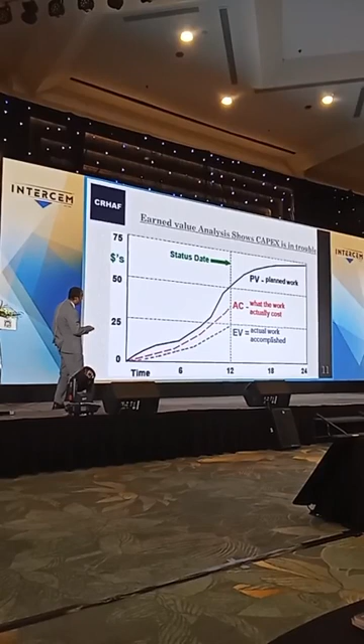We have put a cost like this. So this is $50 million, let's say total project is 75 million, and out of that, say 50 million was our budget for this progress. We have reached to this level, but we have incurred this cost. So this is basically PV, AC and EV.

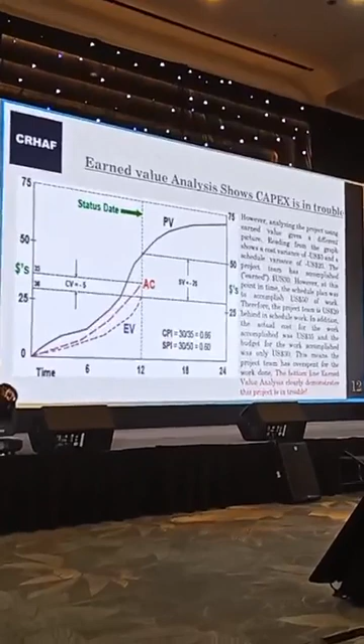So this sheet you can understand more elaborately on this. Let's say, okay, now let's say this situation where we plan for total project of 75 million. Our plan was 50 million in the 12 months to do the activities of 50 million.

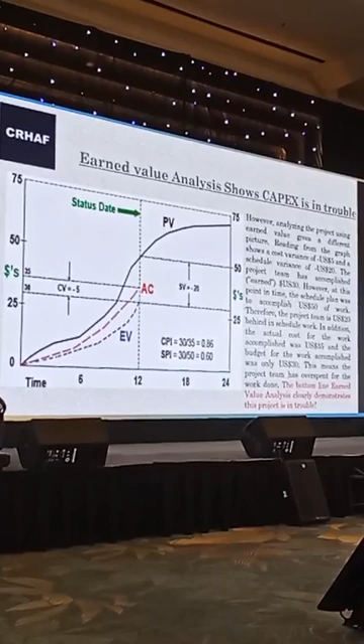We achieved the earned value there, which is around 30 million. But actual cost incurred is 35. So this is basically the schedule variance: 50 minus 30, so 20 million. And this is the CV.

So if you see, in both directions, the project is in a very negative territory. This can be done every month, every 15 days we give the report to the owner, to the investor, outside investor or inside promoters. And we analyze every 15 days the situation of SV and CV.

And from that, mathematically we can get whether the project is in a danger zone or in a comfortable zone. If you see the CPI and SPI, both are below target: CPI is 0.86, SPI is 0.6. So both show the project is in a danger zone. Then comes the mitigation action, how we can mitigate that, what is the real problem, so micro level analysis has to be done to solve this issue based on the earned value analysis.

So this is very popular, particularly for the cement industry, which is very capital intensive. And maximum projects go with 70% debt funding. So it is very important to monitor this, track this. In fact, if you shave IDC by say 10-15% for the whole project life cycle, it gives a huge boost for the IRR for the investor, which will ultimately help the payback period of the project.

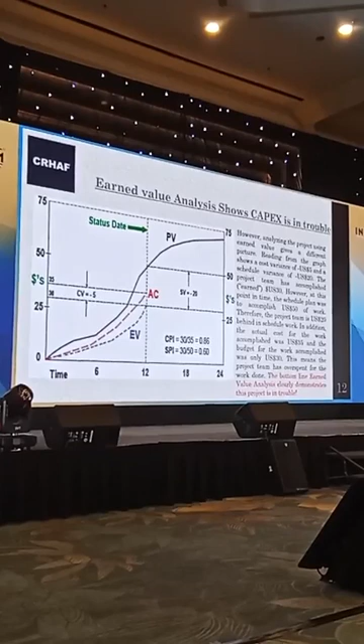The same for when we make the project planning and go for the project execution, we have various levels of contingency. Let's say we make a 15% contingency plan for the whole 24 months. Step by step we can take up the contingency when the project gets delayed or challenges come, and we take care of the cost contingency and the schedule contingency accordingly, and see how it goes and how it impacts.

Sometimes it happens that even though we have put in the contingency, we can come out with a solution for the earlier planned value and earned value, which was negative. We can accommodate that during the project execution, and we ultimately achieve the target time frame and target budget.

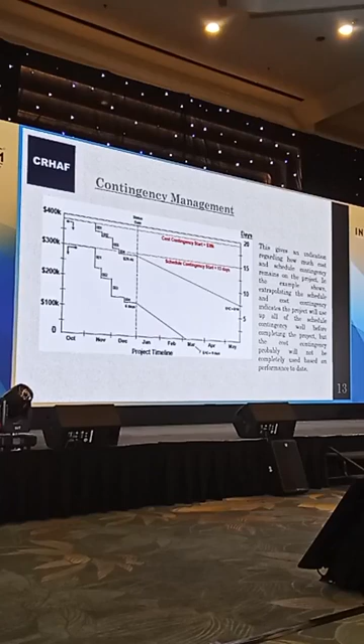Okay, now having seen the mathematical part of the earned value, in the background the ultimate reason for the whole thing is basically the delay. So delay management for the project and delay analysis from the grassroots is very crucial for the project. So how we do that in a mathematical way, and how we make the delay control.

There are various ways of delay analysis, but we feel that for cement projects, which are basically slow moving because you have to have a curing time for the concrete building, we have delay analysis techniques of two kinds: retrospective and prospective. For retrospective we have as-planned and as-built, and for prospective we have time impact and impacted-as-planned.

So this presentation will be available in soft copy, so you can read more on this if you are interested. I'll try to define briefly how as-planned delay analysis works, and how the time impacted as-planned analysis involves the insertion of delay events into a baseline.

So basically, whatever we plan and whatever we have achieved, we make the timeline on that as planned basis. Another approach is the as-built. So whatever plan we have done and whatever we have built, on that we can have a delay analysis approach. We can see the as-planned versus as-built in the same graphical bar chart, and we can see the change of the critical path of the project. It's important that every 15 days we do this, because if there is a big mismatch between as-planned and as-built, and the critical path is going to change, then we try to take some mitigation action to bring the critical path back into the planned zone, so that next month it will be recovered.

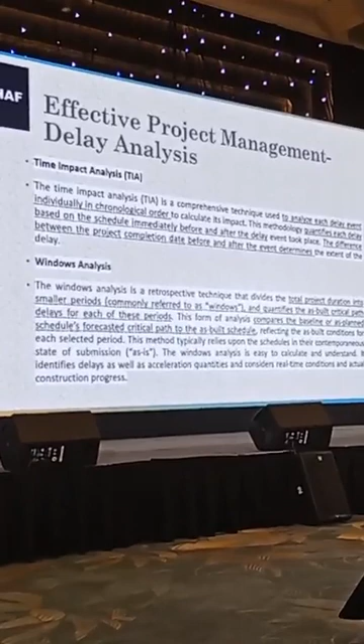Another way is the time impact analysis. Basically, for each delay event, we put all the delay events individually in chronological order and quantify each delay based on the schedule. Similarly, we do the window analysis. This is much more relevant for a project like ours, because there are lots of micro activities, like doing the concrete building, then the machinery coming onto the ground and being put in place, doing the erection. So for each window we make this analysis and try to put it in a figure - mathematically, how many days of delay, and what is the offset from the main bar chart.

Okay, now the commercial part of the delay. When we manage the delay from the commercial side - how the delay will be accountable - we have to put in place a very good contract, a proper contract with the contractor and the supplier, so that delays caused by them can be properly held accountable, and we have to take care of that.

So delay can be of two kinds: excusable and inexcusable. Delay can be on the owner's part, because of the contractor, or both. I tried to define here the Employer Risk Event (ERE) and the Contractor Risk Event. The excusable, or Employer Risk Event, is basically the owner's risk - delay because we could not release the money, or could not get the clearance, or there are other macro events like a COVID-type situation. So we classify what is excusable and what is non-excusable. For non-excusable, we also have to put a figure on how much it is worth in terms of project cost, and accordingly there should be a claim, which we have to match with the contractor's liability. This is also part of project management.

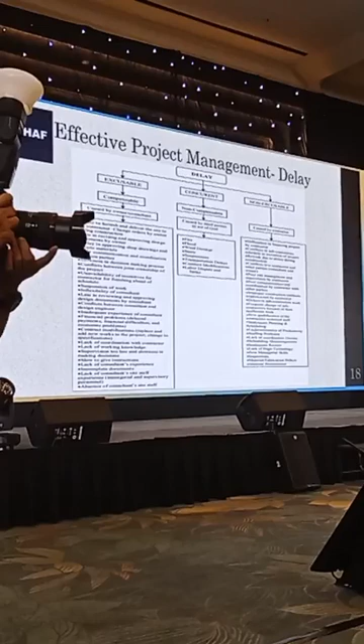And there is non-excusable delay, which is basically due to the contractors or suppliers, and which we can convert into a monetary claim - like poor site management, rework, staffing problems from the contractor, delay in subcontractor's work, inspection delays, and material verification delays. These are all basically non-excusable, and can be converted to money, which we can recover as a loss from the contractor.

Now these are the delay analysis techniques, and these all basically address how we mitigate delay once it happens. We have various approaches to manage delay in the project, which can save at least 80% of the delay event.

So we have the forward approach and backward approach. In most projects, we have this initial planned finish date, and delay happens. So for each activity we put the analysis and see how we can take it, based on the critical path.

Same way, we can shift the actual finished work and see how best we can cover up all the delay and take the forward analysis. In the backward approach also, we take the last finishing date, the cut-off date as per the current situation, and from there we go backward to see how we can safeguard the final commissioning date.

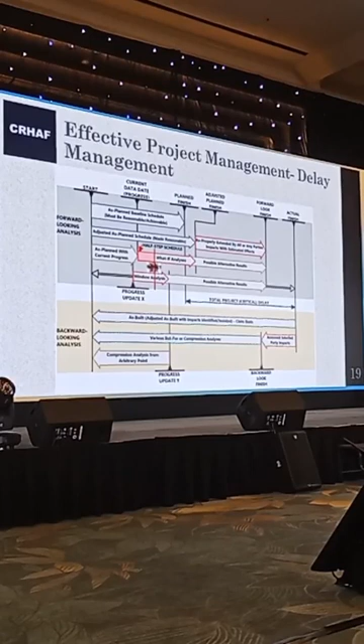So now the strategic part of the project management.

Above all this analysis, this is a basic thing which we need to plan before starting the project and during the project. One is the technical design margin - because the market is dynamic, there has to be a marginal potential capacity of the plant when we design.

And it's very important to manage the finance and spread the drawdown. We need the machine now, or we don't need the machine until, say, after 3 months - no need to pay immediately for the machine. We can open an LC and accordingly spread the drawdown of the fund so that we can save interest during construction.

Then we have the strategic debt equity ratio and managing debt drawdown. Since we go for 70% or 75% debt funding, we can strategically draw down the debt so that our equity contribution is also addressed accordingly.

So these are the dynamic project management and strategic parts of project management, which give recommendations to the owner to make the strategy so that we can efficiently manage the project fund.

By doing all this, we can have a clear margin of debt service coverage, which is very important because in today's world, the high interest rate of the Fed and the US dollar situation is very tough. If we manage 3-4% of the project time per year, it has a huge impact on the total project cost and feasibility.

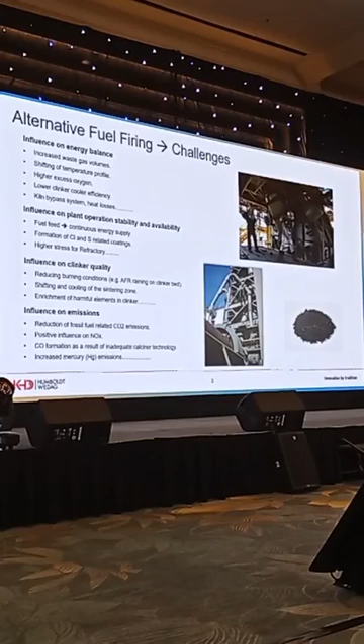The shifting of the temperature profile comes from the burning behavior of alternative fuels. You're feeding lumpy sized materials maybe, and they take a longer time for the burnout process at the end. By this shift, or this longer burnout time for these materials, you're shifting into the lower stages of the cyclones, and at the end the temperature profile is changed a little bit. This means the exit temperature behind the preheater could increase by 10, 15, 20 degrees Celsius.

Also, when you want to burn alternative fuels, you need higher oxygen for the burning itself. This means not only 2-3% oxygen at kiln inlet or behind the calciner will be sufficient. There we are talking about 1% more maybe.

Also, by feeding these alternative fuels, you are putting inside a high amount of chlorine, sulfur, and other things. This means the chlorine contents already coming from the raw material, which may already be creating problems in the calciner duct and the lower cyclone stages in the preheater, can also be influenced by these alternative fuels.

So you are having problems then maybe in these areas, and you have to add also a kiln bypass system, which is creating an additional heat loss of some kilocalories.

But not only all these negative effects I've just talked about are influencing the usage of alternative fuels. There are also some positive effects by using alternative fuels, as you are reducing the CO2 footprint because you're not using the standard fossil fuels normally used here in Vietnam, for example coal or natural gas.

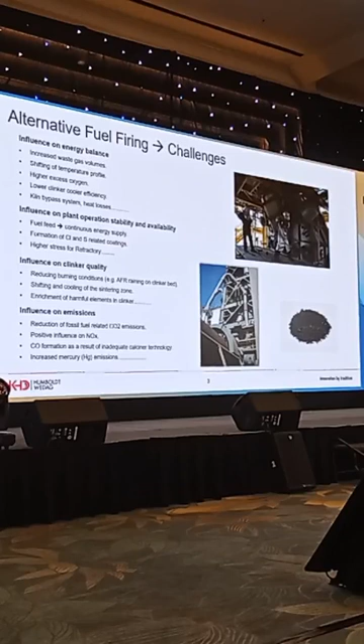We are talking here especially about the pyrorotor, but I want to give you more information later in the presentation. We are talking about NOx emissions coming down by using alternative fuels to a level of, let's say, 500 to 600 milligrams already behind the preheater system.

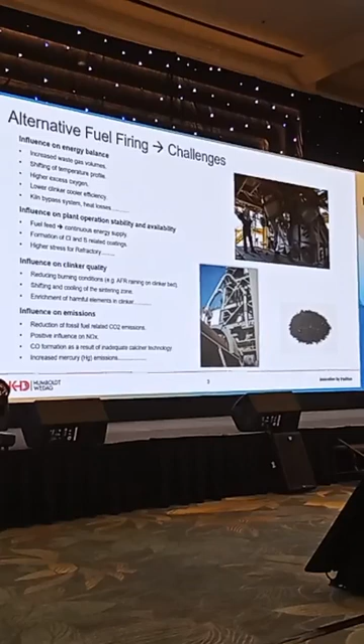When we look at these challenges to the system itself, you have to look also for other challenges when using alternative fuels, and this is the alternative fuels itself. So when you're thinking okay, we can use it, we see the challenges, this is okay for us, you have to think also about getting the alternative fuels from the waste storage areas outside in the right amount.

So we are talking here about values of minimum 10-15 tons per hour, going up, depending on the plant size and the substitution rate you want to use, to 40 or 50 tons per hour. This means up to about 1,000 tons per day of alternative fuels, and this has to be handled and has to be available also on the market.

And then also depending on the system you want to use, because there are very different solutions on the market for using alternative fuels, you have to look at how you are getting the materials, how the situation is in your plant or from the supplier of the alternative fuels, how you can get it in the right size, with the right moisture, and all these things you have to think about.

So at the end, you have to maybe install a storage area with pre-processing equipment inside your plant, with an unloading system, a screening system, a shredding system, and so on. So there are very different points you have to look for, just depending on the system and the waste you want to use.

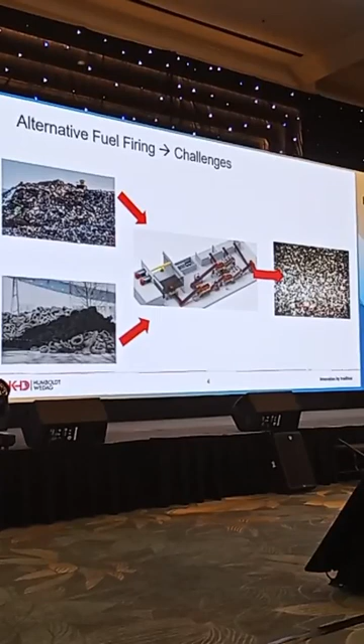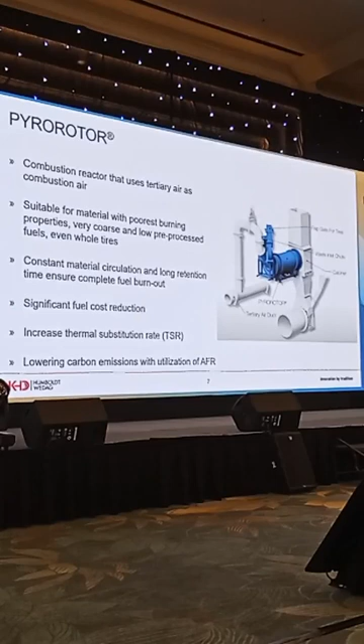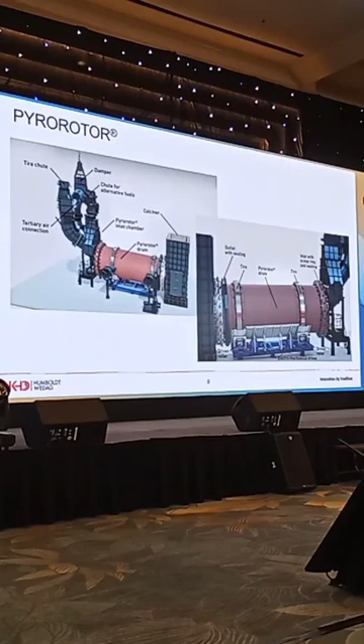So here's just an overview of how such a pyro-rotor looks like. From my point of view, I would say it looks like a ball mill connected to the calciner. At the end, it's like a small kiln, like a small rotary kiln. So you see here the drum of the pyro-rotor itself, the tires, where it looks more like a small kiln. You see the connection to the calciner itself, and also here the connection of the tertiary air, which is used as burning air for the pyro-rotor, the feeding chute for the alternative fuels, and also, if you want to use complete tires, the separate tire chute for feeding the tires inside this pyro-rotor.

So although this product is really pretty new on the market, now for 6-7 years, we are using here in many points a very proven design. So the inlet outlet sealing, the bearings, the rollers, the tires, this is similar to our equipment which we have been using for more than 40-50 years also in our rotary kilns. So you can see it here. The inlet chamber looks similar to the kiln inlet chamber. The sealing systems are completely the same as we use for the kiln inlet or kiln outlet sealings, and also the support rollers of the tires are pretty similar.

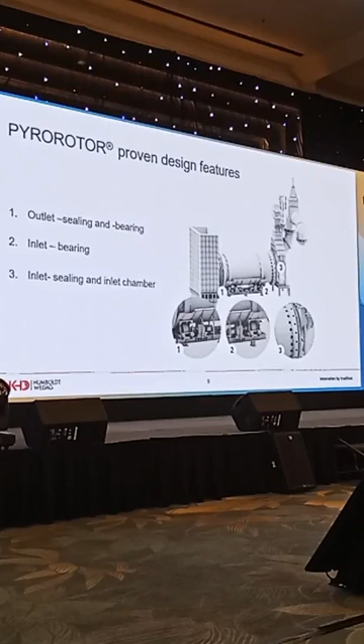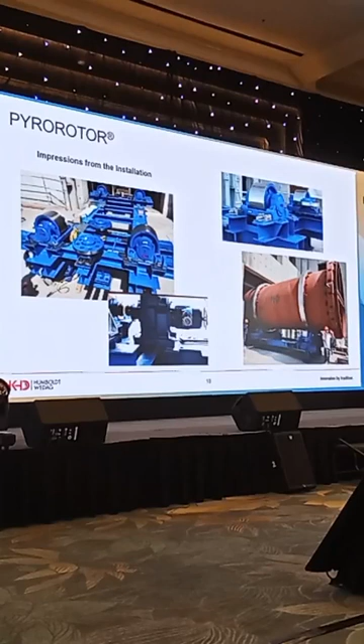Now also some photos from installations. These were from a European country. You see the base frame of the pyrorotor here, where it is later placed, with the rollers. They are directly driven with a motor, so we don't have the girth gear and pinion system like on the rotary kiln - we have directly driven rollers on the pyrorotor. You can see the rollers here, or later on the placed pyrorotor itself on this base frame.

So how's the operating principle? How is such a pyrorotor directly working? Here you see the sketch. As I already gave you the first impression, it's directly connected to an existing calciner system just above the rotary kiln, some meters above.

You need an extraction from the existing tertiary air duct. This means you are taking out from the existing tertiary air a certain amount - approximately 50-60% of this amount is going as combustion air to the pyrorotor. Then you are directly feeding the alternative fuels inside this system and burning the material here inside the pyrorotor. Because of the high amount of fuel and relatively low amount of combustion air, we are creating a CO-rich environment inside the pyrorotor, and the gases then pass through the pyrorotor to the calciner, mixing with the air already coming from the rotary kiln.

In the remaining calciner, we have the effect that the CO-rich gases give the heat on one side to the meal fed from the existing cyclones, for heat transfer to use the heat for the process, and on the other side the CO-rich amount reacts with the NOx-rich environment coming from the rotary kiln. This means at the end you have a good combination of burning the alternative fuels, having heat transfer to the system, and reducing NOx emissions in the existing system.

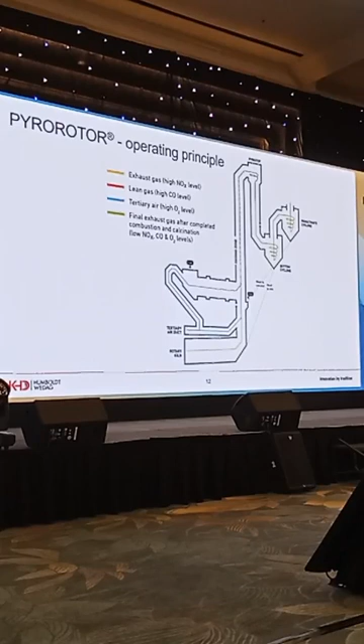So the gas you get from the tertiary air leads to a reaction or burning temperature of up to 1200 degrees Celsius, which gives you a good opportunity for a good burning process, good burnout of the materials, and good behavior of these materials inside the pyrorotor.

With a frequency converter, it's possible to adjust the retention time inside the pyrorotor depending on the type of fuel used. With the new sizes, we can increase this retention time up to 12 minutes now. In the past, with a smaller size, it was only possible to go up to 10 minutes; now with the largest one, it's increased a bit. This means with 10 or even 12 minutes, you're able to burn even very coarse, lumpy-sized material - even whole tires - nearly completely inside the pyrorotor. This is a really good advantage because you're saving costs on pre-preparation, while having the opportunity to realize such a good burnout effect inside the system.

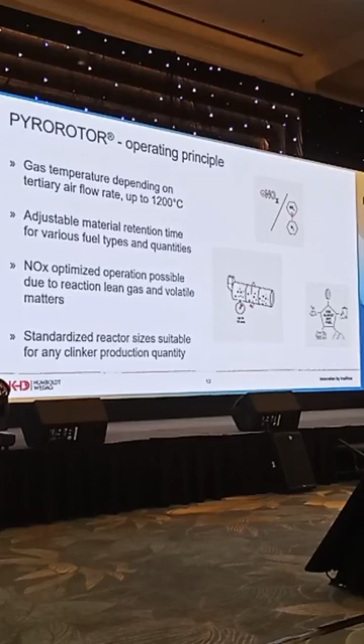Also, as already shown on the paper before, NOx-optimized operation is possible due to the CO-rich or lean gas reaction and burning processes. Now coming to the sizes we offer for the pyrorotor, and also some references.

The standard size is what we normally use on the market. Standardly we offer pyrorotors in diameters of 3.4 or 4.2 meters. This covers the range of production capacity for clinker lines between 3,000 tons on the lowest side, and on the highest side with the 4.2 meter, we can offer for plants with a capacity of 7,000 or nearly 8,000 tons.

When we go below this 3,000 tons range, we have now also developed a smaller size with only 2.8 meters in diameter, and for kiln plant capacities over 8,000 tons, we have a 5-meter pyrorotor. You see the amount of alternative fuels that can be fed to such a system - in the standard range we're talking about alternative fuel feeding capacity of nearly 500 tons per day, or even going up to 800-900 tons per day. This amount of fuel has to be handled also in your plant - you have to think about the size of storage and pre-preparation. This is not necessary in this case with such implementation of the pyrorotor.

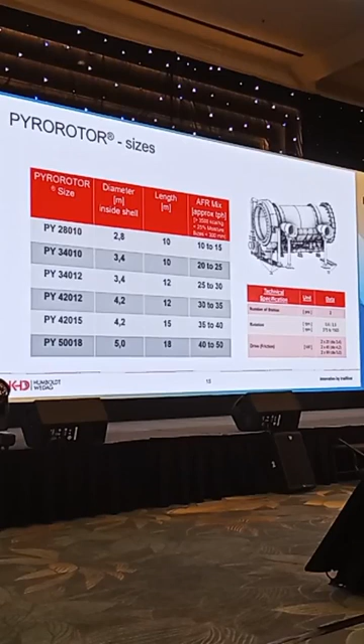Unfortunately, up to now we don't have any reference in the Vietnamese market, but maybe in the future it will come. The advantage is that for such a pyrorotor system you can easily install it into an existing plant without a large range of additional modifications needed.

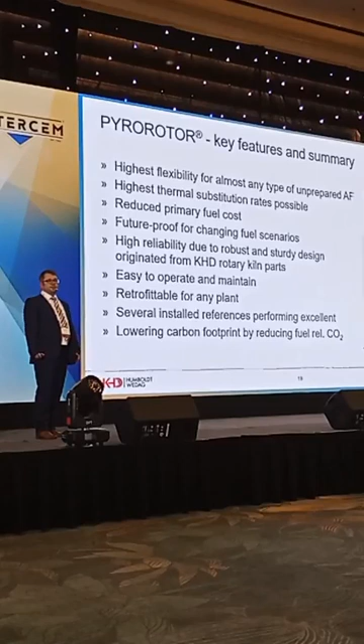So you have a high flexibility with nearly all kinds of unprepared alternative fuels. You can definitely reduce your fuel costs by using alternative fuels instead of standard solid fuels or other standard fuels. And it's a really future-proof system for changing fuel scenarios in cement plants. It's retrofittable to nearly any kind of plant.

We have implemented, as I already said, references in 14 plants. Now 2 other plants are near the commissioning phase, one in Turkey, one in Portugal, which will be commissioned in the second half of this year. There are also already 3 more plants in negotiations, also in South Korea, where the system will be added. So you see there's already a high demand on the market, and maybe such a pyrorotor system is also a possibility for the Vietnam market.

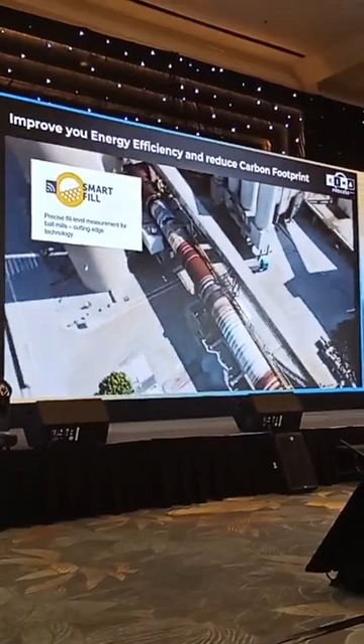KHD Process Control has been providing solutions for automation and process optimization since 1996 to the cement world. You see here a very old dinosaur, a kiln with satellite coolers. Of course, you can change this to a grate cooler, but with much less investment, you can increase the production of a kiln line or a mill by 5 to 10%. This is what I would like to show you in my presentation.

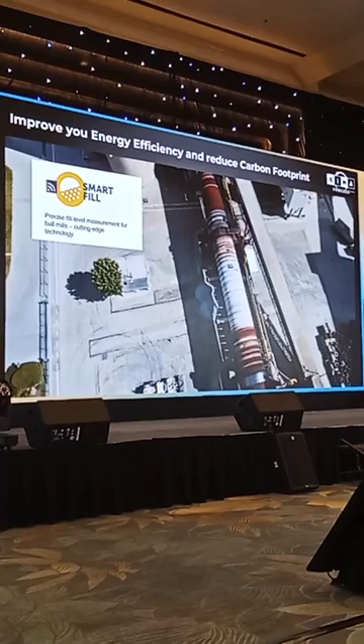KHD Process Control provides this product, and we don't only provide automation in the form of software, driving your mill and kiln line autonomously, like a Tesla car going from here to there without any touch anymore. This is possible with your cement plant also.

But we also provide instrumentation which is designed specifically for the cement industry. SmartFill is one example, which I will show later in my presentation, where I speak about an electronic ear listening to your ball mill to control the feed into this mill and to achieve maximum production.

Another product is the kiln cooler. You see this kiln is painted white. It's not painted, it's the limestone in the water which we spray onto the kiln instead of air cooling. Water onto the kiln - a lot of people are scared just thinking about that. Forget that. We don't take a big water hose or garden hose and put water on it. We make a water mist on this kiln, and the limestone in this water remains on the kiln, so we paint kilns white.

The target behind this is energy reduction. What you do today by cooling with air blowers, we cool in the meantime with a water mist - more efficient, less cost intensive.

We designed another instrument which I would like to introduce in my short presentation: the gas temp flow system, a specific measurement system based on an acoustic measurement principle, which measures gas flow and gas temperature rapidly, fast, and more precisely than any instrument before. This opens an opportunity to operate and control your kiln much, much more precisely - controlling the kiln, controlling mills.

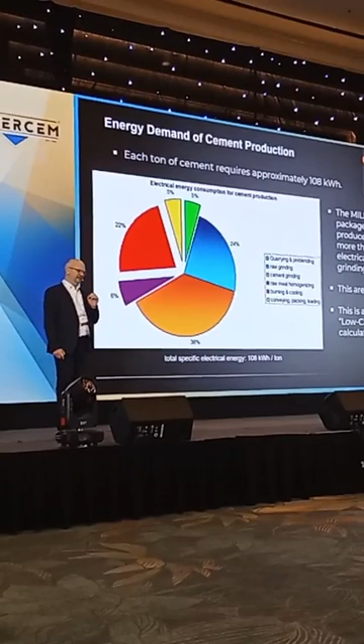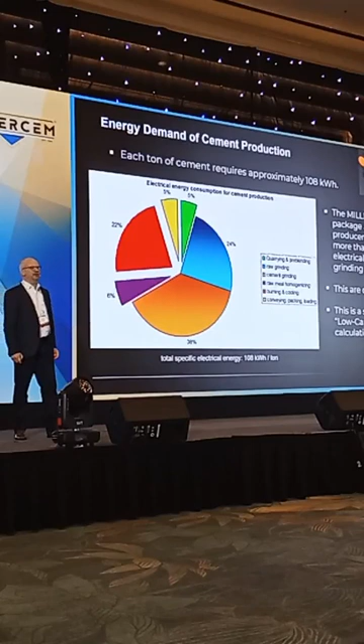Here you see the big portion in blue and the big portion in orange. So 2 of 3 energy demand portions comes from grinding. The ball mills and vertical roller mills need so much electrical energy that we as KHD provide you a system which can easily, with 1 week of commissioning, reduce these costs by 10%. Low-hanging fruits. With specific energy, specific instrumentation and control software, we are able to cut 8% of the entire energy production needed to produce your cement.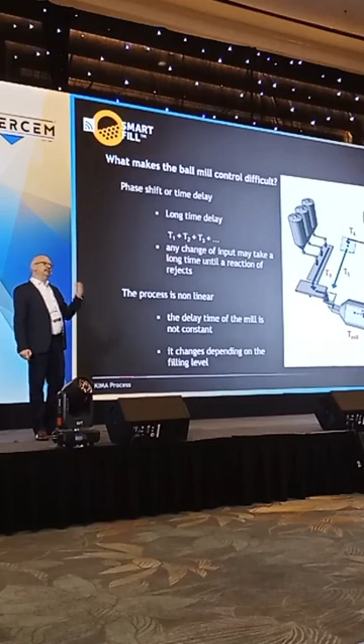What makes that possible? The difficulty in cement grinding is the changing grindability of the material, the hardness. It's necessary to measure this hardness because it drives how long the material has to be in the mill. Using electronic ears has been the answer for years.

KIMA Process Control provides a market-leading product here, the electronic ear SMARTFILL, installed on over 900 ball mills all over the globe. All big players in the market are using these electronic ears, not only in combination with our optimization software, but also with their own expert systems.

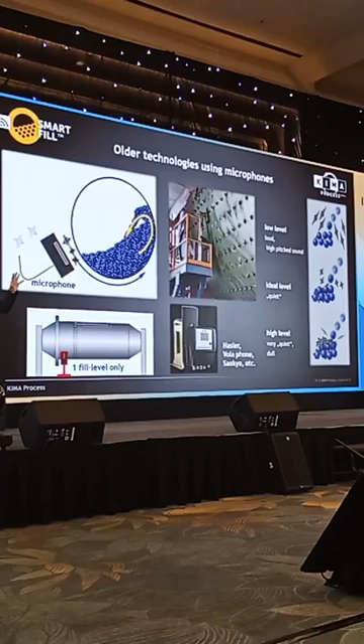If you compare it to older technologies like the microphone system, you'll quickly learn that a microphone system, which you can buy for $5,000, listens into your mill, but it also listens to the other mills because there is crosstalk between mills - it's an ear open to everything. The KIMA product is completely different.

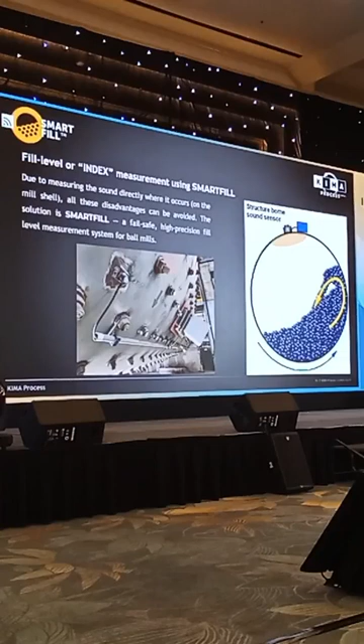We are installed on the mill body itself, and we listen, as you can see in this small video, with a box on the mill, precisely in chamber 1 and chamber 2, using vibration sensors. These vibration sensors cover structure-borne sound, so there is no chance for outside acoustic noise to be implemented in this measurement.

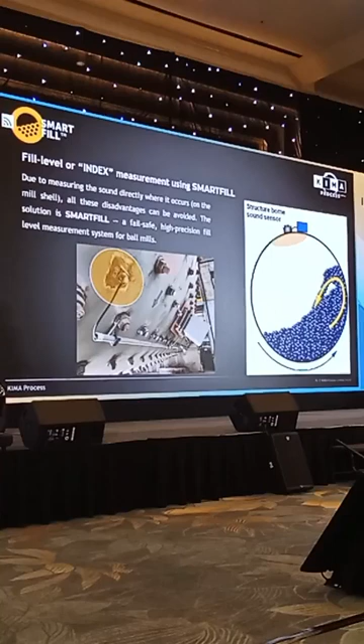So we are usually 10 to 20 times more precise in measuring the fill level, which is analyzed on a full 360 degree basis. Whenever there is wear in your balls, the flying curve will change. Microphone systems have to be recalibrated usually once per month or once per 3 months.

There's no necessity with this system because it always gets the main impact point at any pace. I'll jump a bit, because we don't measure only the precise fill level in chamber 1 and chamber 2, but also the temperature in the diaphragm. This avoids dehydration of the gypsum in cement mills.

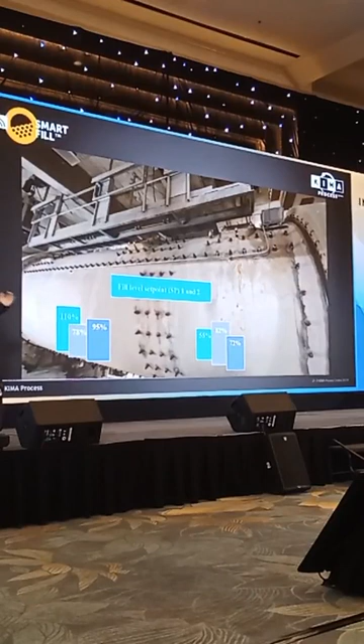I don't want to be too technical because you are more concentrated on the cost efficiency of production. So let me just tell you that with this instrument, you get the opportunity to find a so-called fingerprint for the optimum adjustment of the mill for each type of cement.

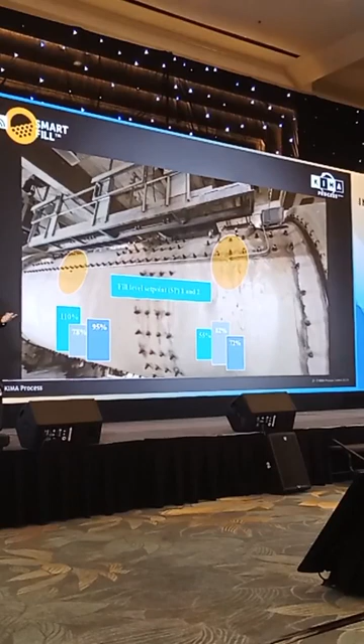When you change your production in one ball mill from ordinary Portland cement to a fine cement, a slag cement or a limestone cement, this system knows in advance what is the optimum adjustment, and you don't have to wait for laboratory values, which usually come 1 or 1.5 hours later. This saves time, avoiding the so-called intermediate product - a product you usually mix under your quality cements - and the result is an always optimum process. You see that shown on this slide.

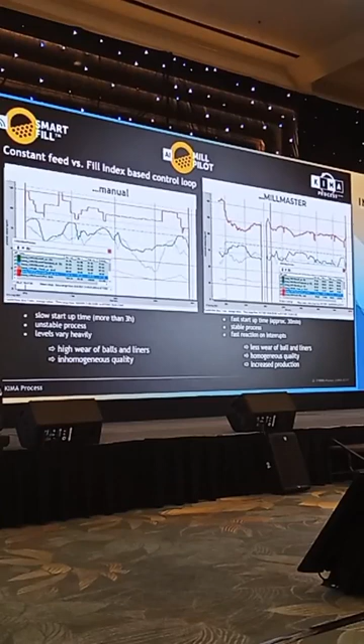On the left-hand side, you see the green and blue graph showing the fill level in the mill. In this moment, when the mill is full, you create a completely different cement type than here when the mill is empty and ground completely out. On the right-hand side, you see the graphs when the mill pilot or mill master is operating the mill - our high-level control software - instead of the operator.

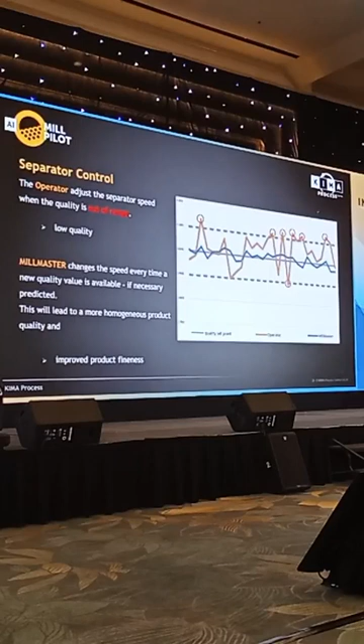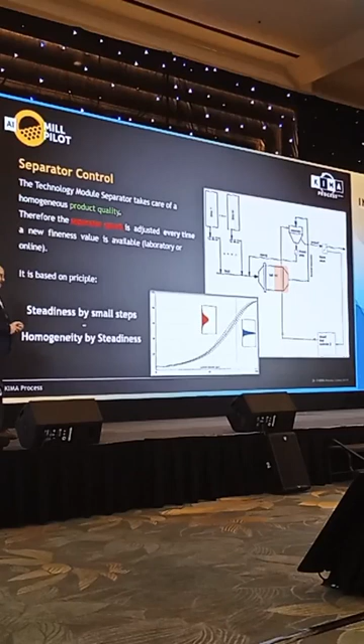Now, with this control, we even get a better quality of the product. This is what I wanted to say, because it is more and more important today that you have your cement quality sharp where it should be. This system allows us to reduce the left and right, making it more sharp than what you would achieve otherwise.

Now let's come to figures. I said at the beginning we can reduce energy consumption by nearly 5, 8, 10%. Let me give you an example. You have a production of 130 tons per hour with a ball mill, operating usually 7,200 operational hours per year.

Your relative power consumption today, without Smart Fill and Mill Master, is 65 kilowatt hours per ton. When we say we expect a minimum of 5%, ladies and gentlemen, we always reach that 5%. I'll show you case studies later with 10 and 12% production increase or energy consumption reduction.

Now, the reduced electric power in absolute terms is 3 million kilowatt hours. With a cost of 10 US cents per kilowatt hour, a normal price for power, this saves you 304,000 US dollars per year. So the return on investment for such a system is less than 5 months.

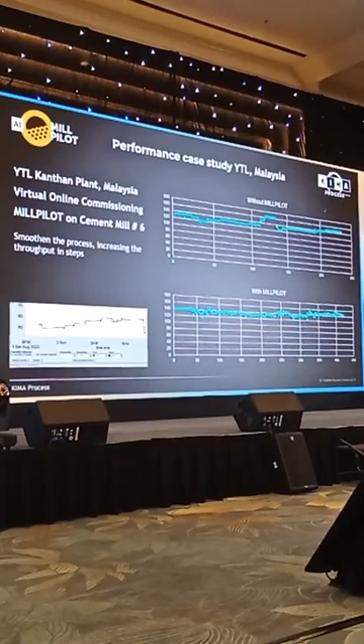This 6% is not only visible in the graphs, it is also confirmed in the performance letter we receive at the end from the customer—certified, stamped, signed. So with Saurashtra Cement, Mehta Group, okay, there we really caught the bird, let me say.

From manual operation of this mill to autonomous operation, we achieved an incredible 12% production increase, and you can see that easily on the graphs. Here is the fresh feed controlled by manual operation, showing the big losses that always occur with manual operation. Below, the graph with Mill Master shows the production increase.

Now, this AI control technology is not only used on mills. You've seen the example of ball mills, but the same software can be used for vertical roller mills, roller presses, and the combination of both. I visited Vissai Cement in Vietnam a year back and showed that in the combination of roller press and ball mill, there's a huge optimization potential. I think we will come close to negotiating a first pilot project here in Vietnam as well.

However, we have another AI solution for the kiln. Here we have to talk not only about the software, but also about the necessity of having better instrumentation.

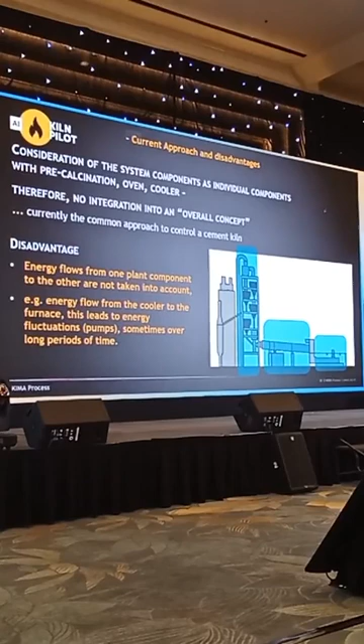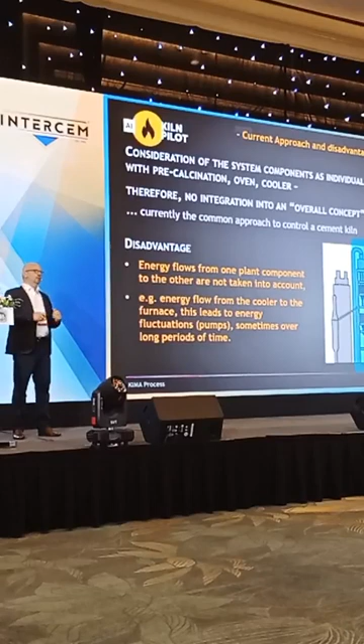There is a gas flow between these modules and, excuse the word, but we are technicians—enthalpy. Enthalpy is energy, so this energy exchange between these modules is necessary to measure. It was not possible before, but KIMA designed a sensor called Gas Temp Flow, which measures precisely temperature and airflow. Now it's possible to bring all these 3 modules, which were separately controlled before, into one optimization package.

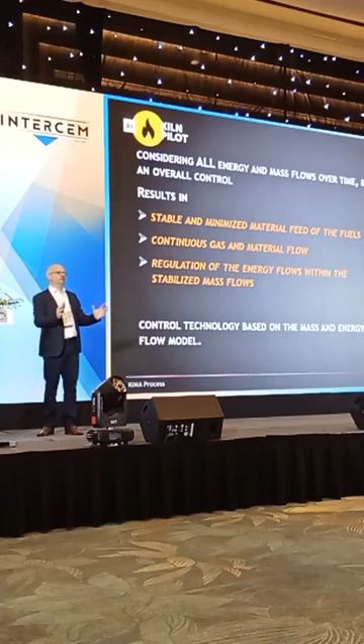We control the entire kiln line, and we install, as you see the yellow spots here, the Gas Temp systems, which now precisely measure the exchange between preheater, kiln, and clinker cooler.

With this optimization potential, we can reduce the exchange between these modules, which creates a so-called shifting. There is usually a shifting between these modules. We can reduce this shifting and keep the energy always at the same level. And now I'll give you a figure.

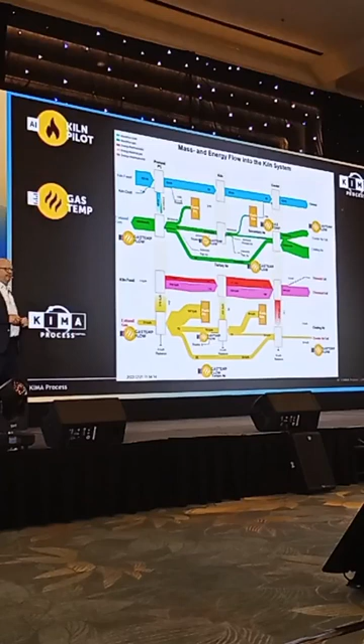Using this control philosophy and this precise measurement in between, we are able to reduce the energy consumption of a kiln between 5 and 10%. Have you an idea how much 5 to 10% energy costs of a kiln line mean? We speak about millions of euros.

So what you see here is a first ever done balance sheet of the mass flow and the gas flows, again, the enthalpy exchanged between these modules. And here we have the opportunity with a time scale to move in time and look also when something happens. What was the reason? And I'll give you some example.

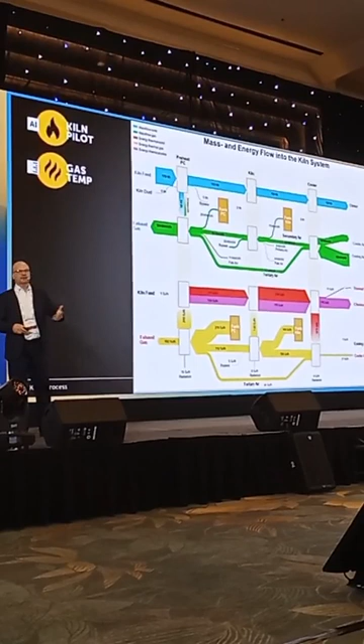This example could be, for instance, the fuels in the pre-calciner. The fuel change from a KHD pyrorotor. The pyrorotor is working properly, but instead of tires, there are no more wood chips inside. In this moment, the heat value changes. With this system, we immediately see the effect on the entire pyro line, what is happening and what to do. The system is covering that. Or the main burner, if the main burner flame changes the energy content, we know immediately what to do, so we can reduce the energy costs.

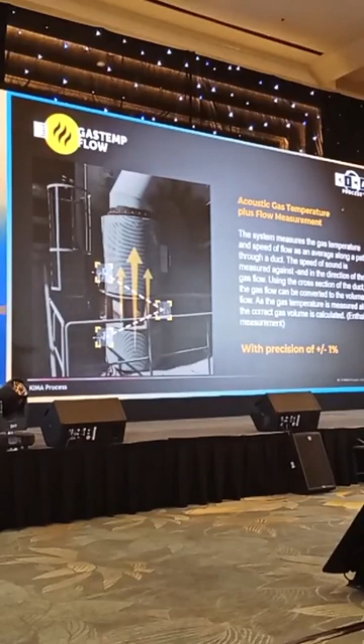But now, again, figures. To come to a cost reduction using this gas flow measurement, I would like to show you an example from the downcomer. The downcomer installation is very easy, you see just these 3 sensors. We installed it in the Heidelberg Materials plants on both strings of the downcomer.

And the investment cost of, attention, 30 to 35,000 euros per system can be converted into a return on investment computation very easily. We measure with a precision of plus minus 1% now the airflow. Today, with existing temperature and flow gas measurements, you are using Venturi or delta P measurements. These measurements have an accuracy of plus minus 10%. Now, to operate on the safe side, you produce in your ID fan, you suck, instead of 500,000 normal cubic meters, 10% more, 550,000.

With a precision of 1%, which we get from the measurement, you can reduce at least 8% of gas in this moment. And this is what I show here. Your ID fan power consumption per hour in a 4000 TPD line is usually 2 megawatts. So we speak about 2000 kilowatt hours, which you use just for the ID fan. So if we reduce that by 8%, which is possible with gas temp flow, you have a reduced electricity consumption of 1.2 million kilowatt hours.

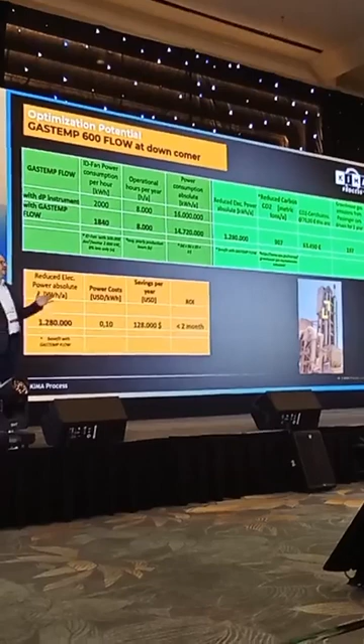I myself, Dirk Schmidt, I'm sitting here in Hanoi. I have my Asia Pacific office established in Hanoi, very near to the Vietnamese cement industry, but of course also to Thailand, Malaysia, Indonesia, Singapore, India, Australia. In Australia, we have a market share in the meantime of high-level control systems for mills of 85%. So there are just a few plants anymore which don't operate their mills with our systems.

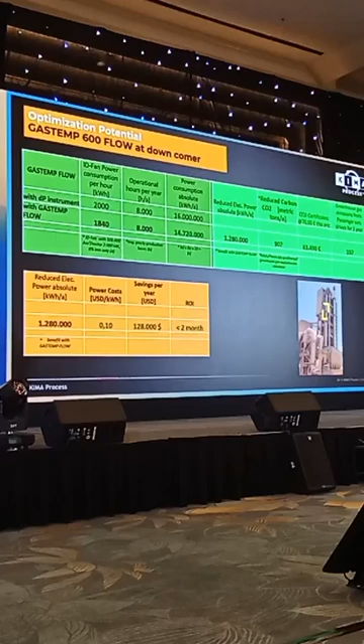And one thing I can tell you and promise you, these technologies are no longer a nice to have. To be competitive in cement production, there is a serious need to have them in future. That was my presentation. I hope it was interesting, and I would be pleased to come into a personal dialogue later at the booth. Thank you so much.